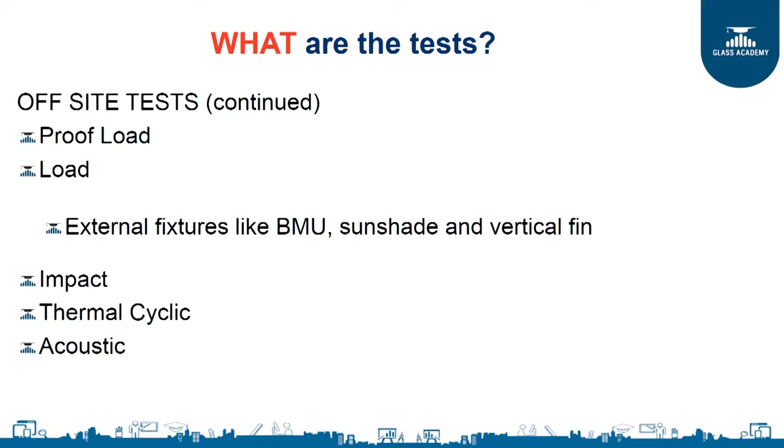So you can actually measure how much noise is coming through the facade and what can be done to reduce that sound. Using the right kind of glass, the right kind of system and the gaskets, you can cut down quite drastically the amount of noise coming into the building. You can simulate this by creating a noise outside, have a sample and measure the noise from the inside. So acoustic testing is slowly gaining popularity in India.

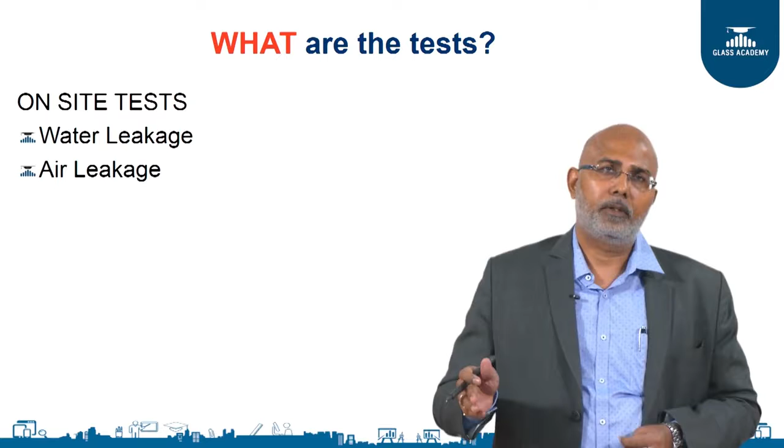Now, on site - once this off-site testing is done at the lab and everything is passed, the architect and the consultant say okay, your sample is good to go, start production and then start installations. So in order to ensure that the same kind of care is taken at the site and to ensure the quality, there are specifications again for checking the water and air at the site.

For water you have a specific nozzle as per AAMA 501.2, and there is a calibrated pressure gauge, and we have a high pressure of water sprayed in a particular pattern through this specified nozzle on the vertical and horizontal grooves.

This is a random sample that will be selected by the architect. Nobody knows which area is going to be tested, it could be any area. So this testing starts and then all the vertical and horizontal grooves are tested, and a typical sample is 3 meter by 3 meter, and it takes about an hour and a half to check all the joints of that particular sample. People are standing inside the building and observing it. Obviously, the pass-fail criteria is that no water should come inside.

And for air leakage, in order to do the air testing at site, we need to build a small temporary chamber using very thin plywood, and then have a blower connected there, have a manometer to measure the differential pressure, and have the array of nozzles spraying from outside just like we do it in the lab for 15 minutes and check for water if it is a window, and you have an airflow meter in the blower that will measure the leak through the sample at the site.

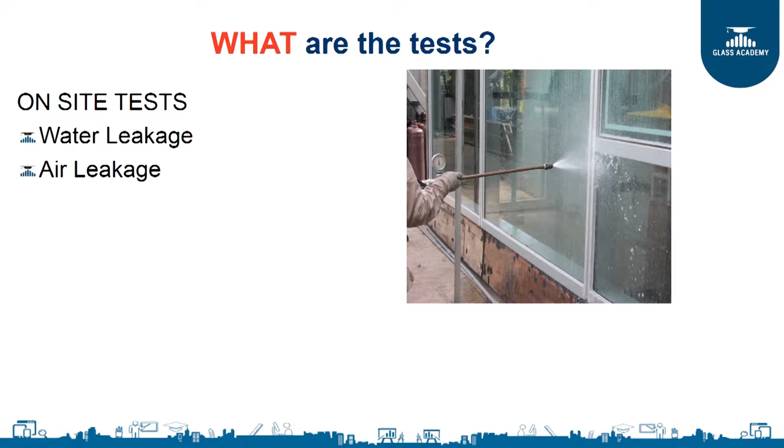This is very essential, especially the water test, for skylights which are used in public spaces, because even a small hole on the top can lead to a lot of leakage of water and cause accidents of people slipping and falling, or damage to property or the interiors of the building. So on-site water tests are very important to ensure that consistency of delivery at the site can be ensured by the fabricator.

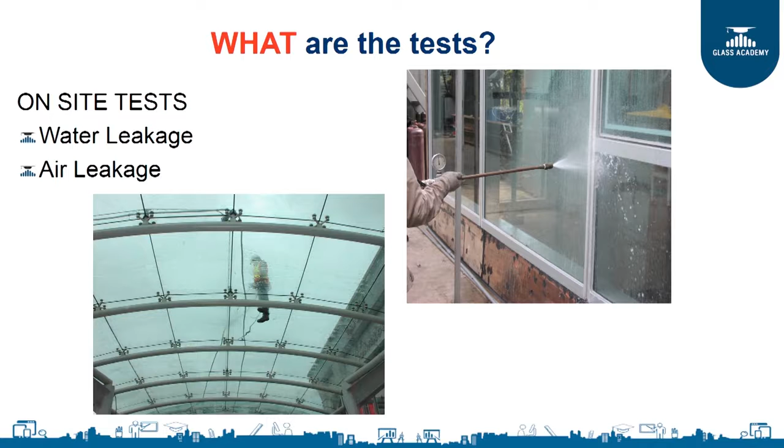Then load tests - basically you have the expansion bolts which are anchored into the concrete, and those are the anchors holding the brackets, and the entire facade is mounted onto those brackets. So there is a lot of load on that particular anchor bolts.

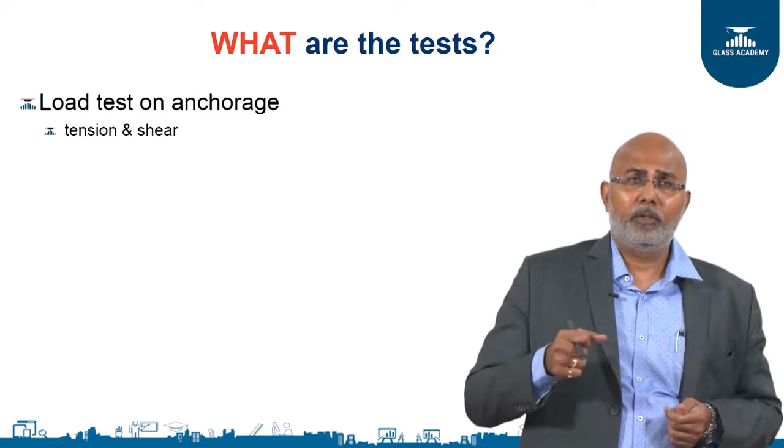So there are tests to pull out and see whether the anchor bolts are able to take the load. Those bolts are tested even on channels which are cast in - nowadays people are casting the channels into the concrete, and then the bolts are slid into that channel, and then the bracket is installed on that particular channel. So we do a pull out test and see whether the channel is able to take that design load, and there is no failure over there.

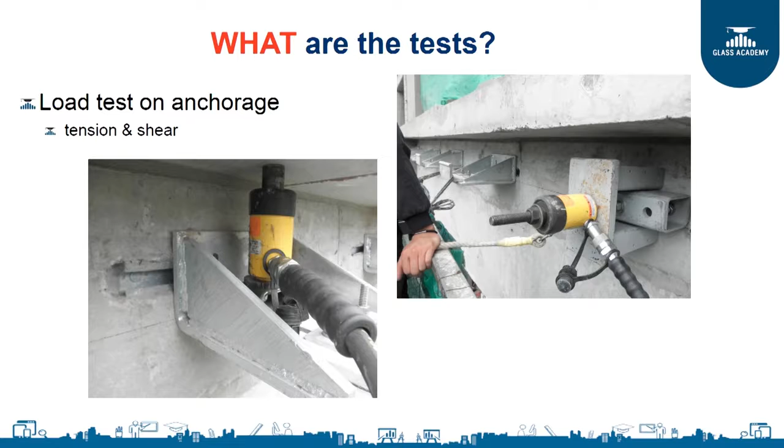And also the shearing of that—you push the thing on the side and ensure that the bolt does not shear off because of the load, the vertical dead load.

Now, which are the standards to apply? The most prominent standards in the world now being used by consultants is the American standard, which is ASTM or AAMA.

Or the Australian New Zealand standard, AS/NZS, or the British European standard, BSEN. Now, which standards are good, which is bad? I would say all of them are equally good, and they have evolved over a period of time based on the requirements and based on the experience that these people had, and they have improved constantly and upgraded constantly.

So in that sense, whichever standard you follow, and you get a product which passes those standards, you can be assured that you are getting a good value for that product.

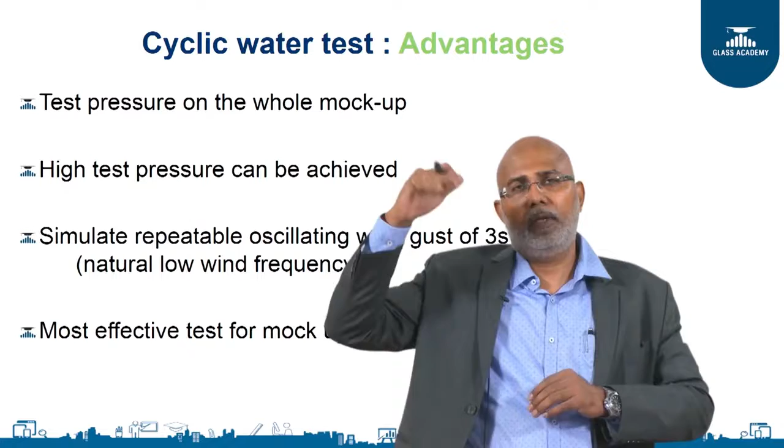Now, the advantage in the cyclical test that we explained earlier is that the test pressure is on the entire mock-up. Every square inch of that mock-up has got the uniform pressure which is created in the chamber. Unlike dynamic, where the pressure is high in the periphery, and then as you go away at a distance it drops because it is open to sky.

So here you have a uniform pressure on the entire sample, and you can go up to much higher pressures to test it. Its gusts, actually the 3 to 5 seconds, is almost like a natural low wind frequency—it is being repeated, and it is very effective for mock-ups.

It is a very difficult specification, and if the water passes in a cyclic test, it is actually a very good result for the designer, and commendable, because it is very stringent.

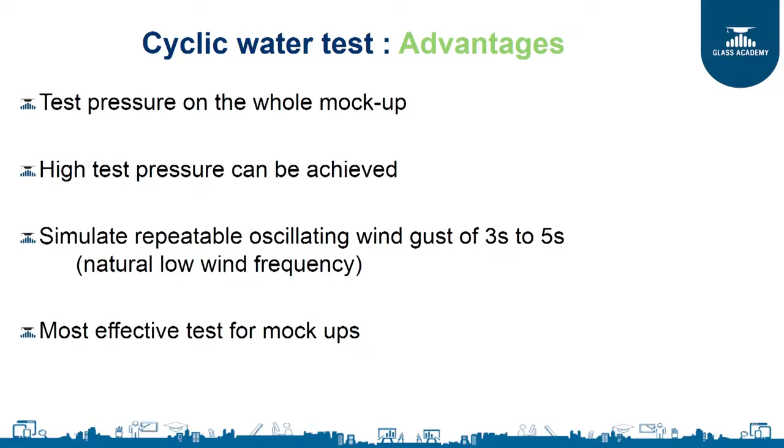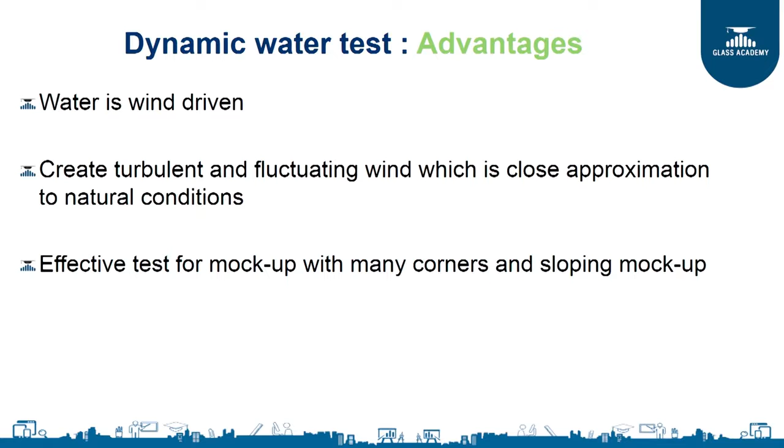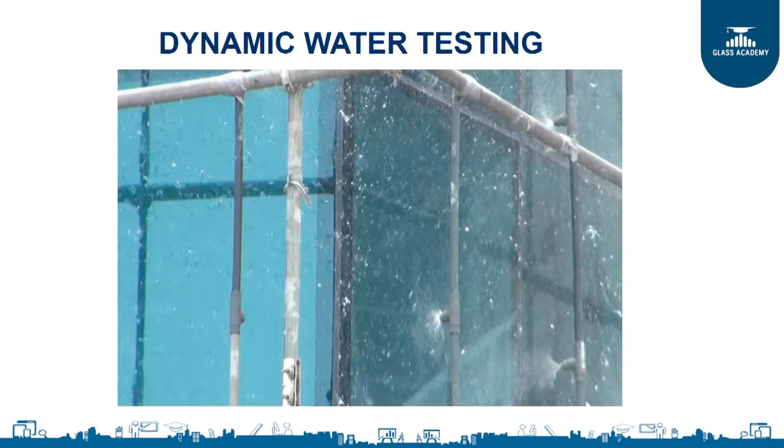So there are videos attached to show you the static water, the dynamic water, the seismic movements, and the structural tests. You will be able to understand better when you see the pictures.

Now, which standards to use? Some of them are lenient in one particular area, but they are very stringent in the next. So in essence, whichever standard you pass, it does not matter which one, you will end up with a very structurally sound, watertight, and highly air-efficient, energy-efficient facade.

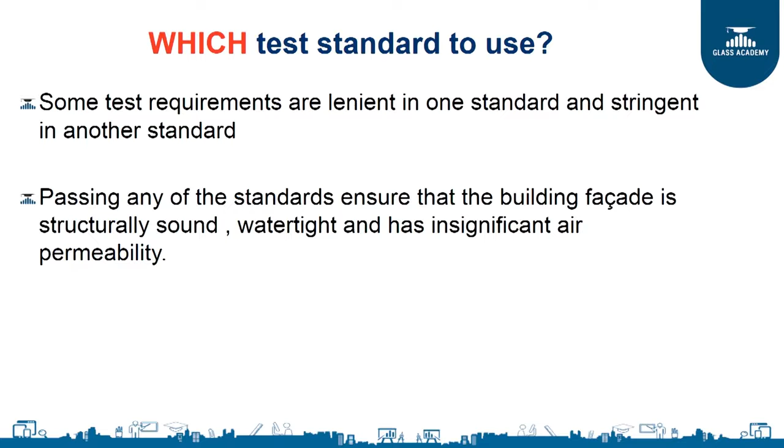Now, coming to the mock-up size—what should be the mock-up size? The specification says a minimum of 3 panels width and 2 floors height. That is the minimum size that should be tested, and sometimes the consultant also asks for a corner, because the corner is a very critical joint.

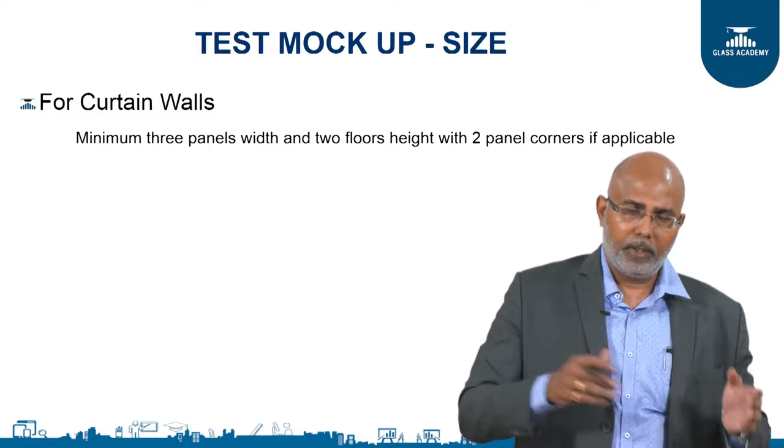It is 3 panels width with 2 panels in the corner. So this becomes the minimum size for a mock-up sample.

There are some pictures of mock-up samples just to show you how it will look. This is at the laboratory, it is not the real building—the sample is constructed at the lab to test it, and it is an exact replica of what is happening at the site.

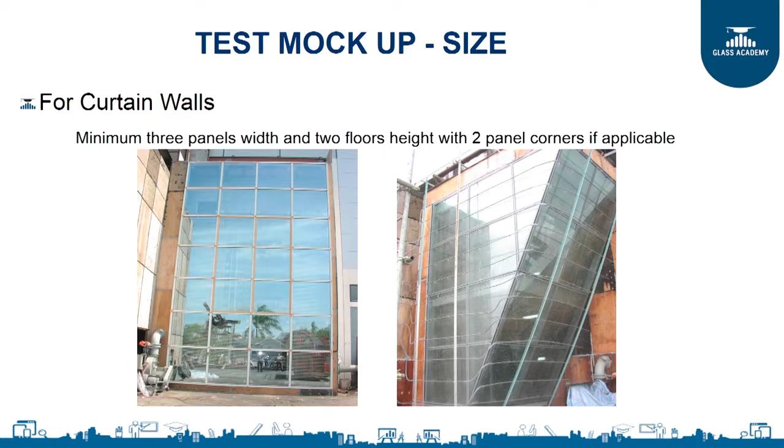The same design, the same profiles, the same elements, the same screw, bolt, nut, gaskets, glass which is used in the building—it is going to be tested. So this is how it will look as a sample.

For the windows and doors, test the largest window in that particular project using the same profile. If you have small windows and big windows, and all of them use the same profile and the same glass thickness, then test the largest, so that all the smaller windows are automatically passed along with it.

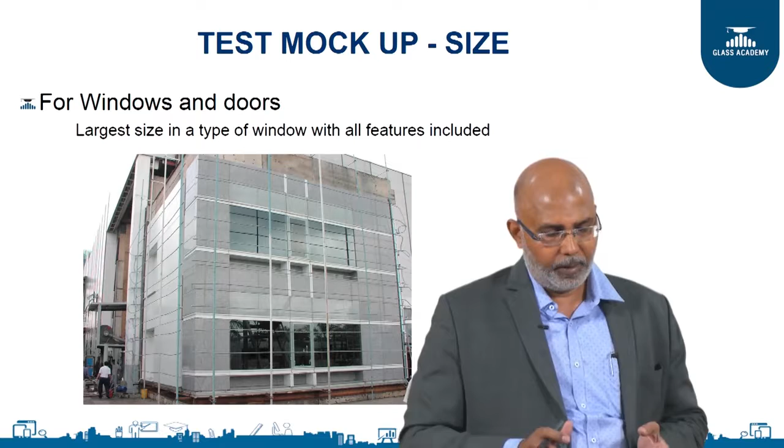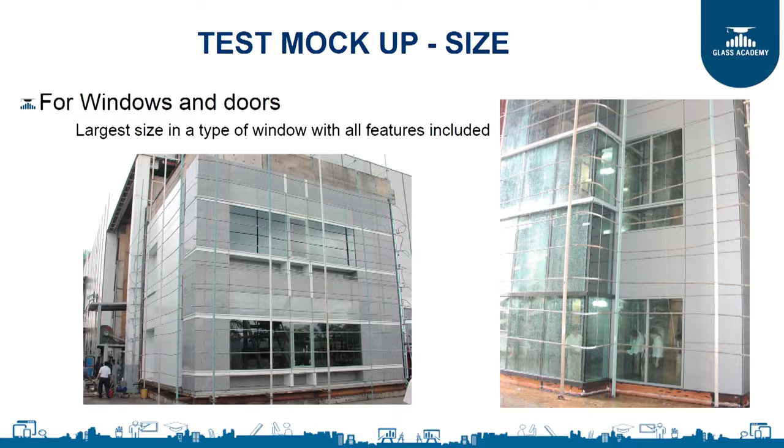This is another sample where you have a fixed glazing curtain wall with a window and aluminum composite panel, and people are standing inside the sample, and there is a water test going on, and they are seeing if there is any leak through the window.

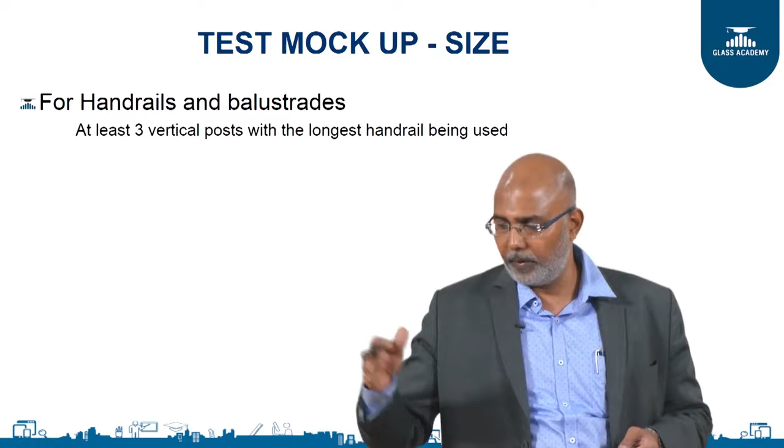For balustrades and handrails, at least 3 vertical posts, the sample should be having 3 vertical posts, if there are vertical posts. Nowadays, you have a lot of windows, handrails where you just have glass held in the bottom with aluminum clamping system. In that case, you need only the largest aluminum glass panel to be tested, one panel. When there are handrails or balustrades with vertical stainless steel posts, and then there is a handrail, then you need to have at least 3 verticals on that sample.

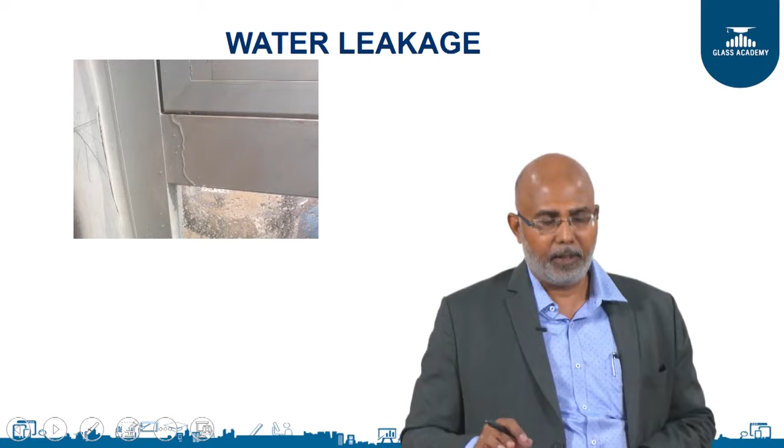So, what are the common failures that we see during the test? Typical failures will be water leakage, where you see here water is leaking through the openables, droplets coming in through the joints.

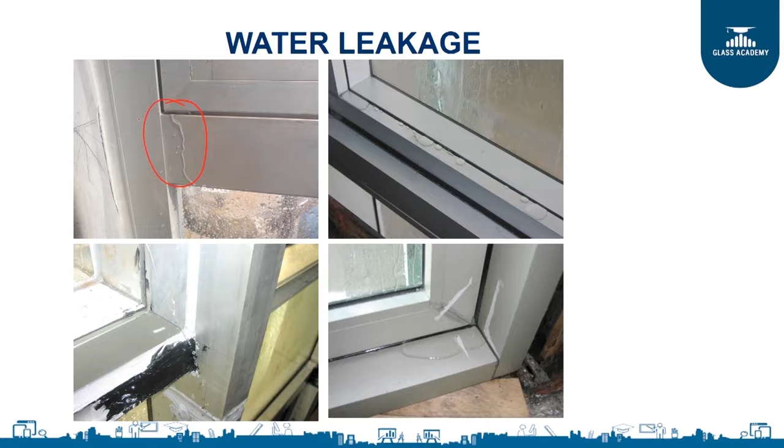These are typical fabrication issues which can be addressed either because they have not cut it properly, or sometimes it is a design problem. For example, over here there are probably not enough drain holes on the window shutter on the outside, so the water is overflowing into the inside of the building. Water leakages are very dangerous and totally avoidable. If the design is good and the fabrication is good, you can avoid any kind of water coming into the building, because it is very difficult to identify where it is coming in from.

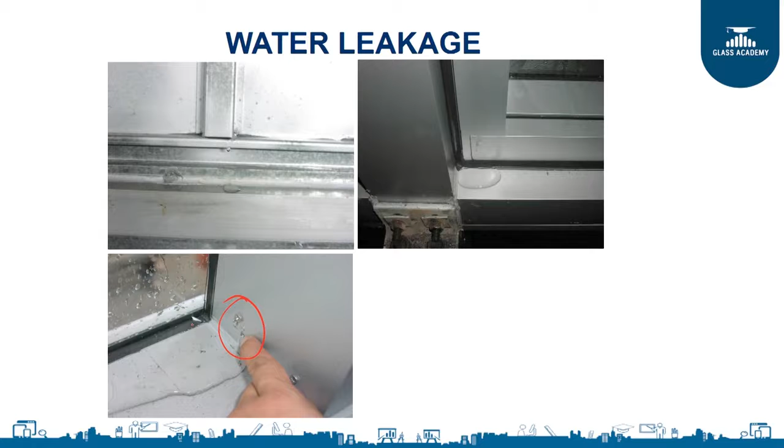For example, you see the small screw which has been put into the aluminum frame. Whenever there is a screw to be put, they usually use silicone on the screw and then tighten it, so that the silicone closes the little holes which are created over there. Here the screw has been put without that silicone, and there is water dripping in through that little hole. So, this is again an example of bad fabrication.

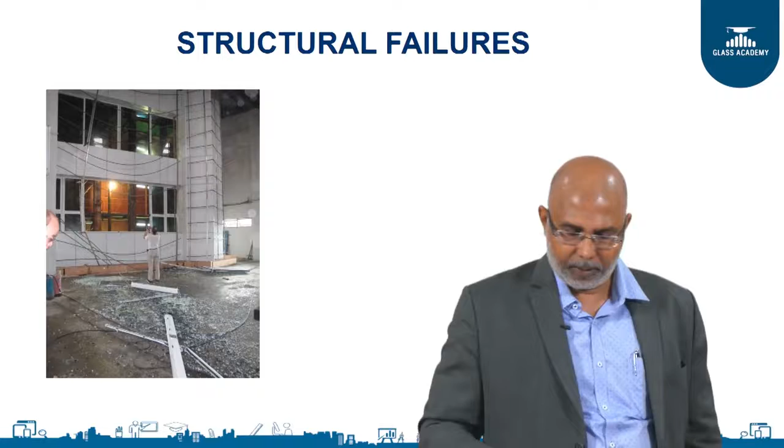And then you have structural failures. Here the entire glass is blown out, it is not able to hold tight. The wind loads, this will really happen in the building. If suppose this is a 30-storied or a 50-storied building, can you imagine what will happen if the glass shatters, and even a small piece of 2 square inches of glass falls from a 30 or a 40-storied building, it comes down like a bullet, and if it hits somebody on the head, it is going to for sure break his skull.

Here you see the aluminum given way because of the structural load, it is not able to take the load. A panel has come out of the mock-up sample. These are all typical failures that we see, and then corrective action needs to be taken to ensure that this does not happen in the real building.

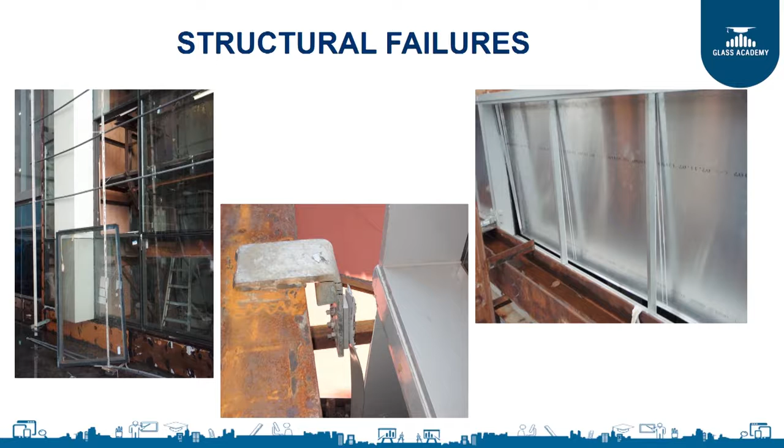Reinforcements are done, the aluminum itself is buckled because of the wind loads, or you have typical situations where the glass panel is delaminated, come out, the composite back pan tray which is there in this curtain wall has come off, not been anchored. The aluminum is sheared off from the bracket, just torn out because the thickness of the aluminum is not adequate at the point where it is anchored.

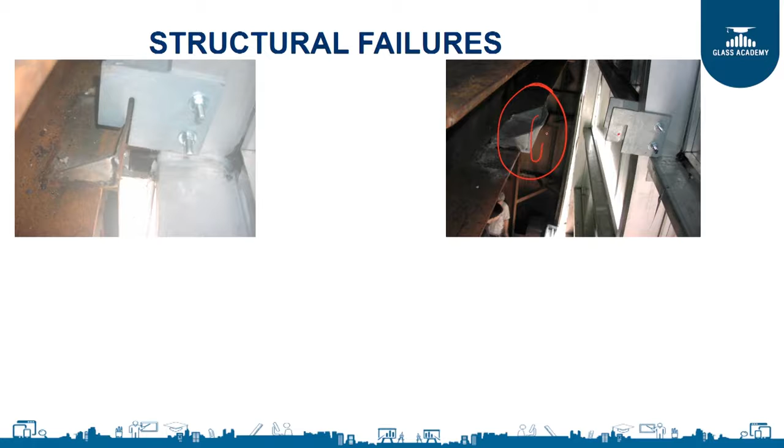The bracket has come out of the whole lock because the whole system has moved out, it is delaminated. Again, here you see the bracket is totally gone, distorted, and the lock which is supposed to be hooked in here has actually slipped out and come out. So this is the slab, and this whole curtain wall has come out by so much. Here the glass is blown out. So these are all typical structural failures that we see.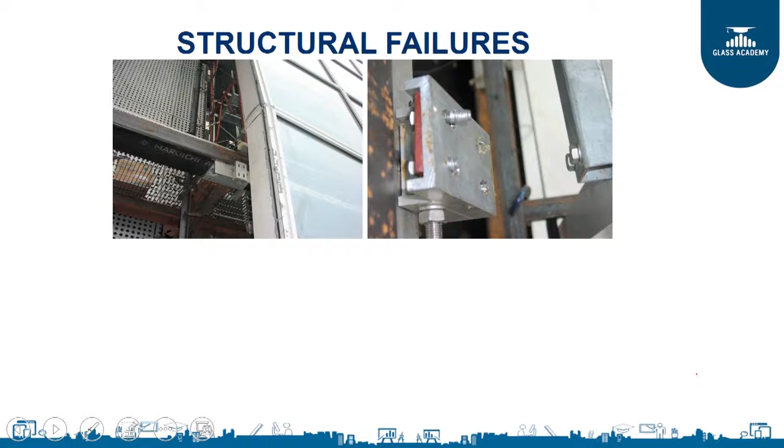The pin is sheared, a locking pin.

So, these are some of the failures that we see, and at the end of the day, any product that we use in our lives, we use it after it has been tested. That is how these products become iconic. What is the difference between a successful product, an iconic brand, and a cheap one? It is the consistency with which it performs. And how do you achieve that consistency? It is by putting it through a rigorous test, so that under normal conditions it performs beautifully.

So, at the end of the day, a facade is like any other product. It is designed to do certain things, and there are clear established parameters. All we need to do is to measure that and see whether the performance of that particular facade is matching the parameters that have been specified, and if it is, then you get a good product.